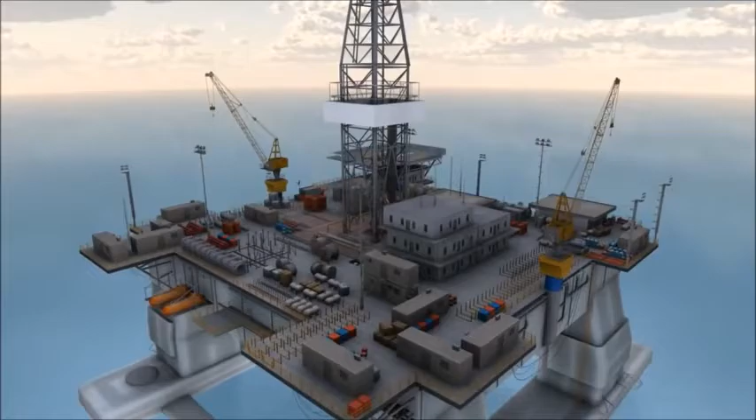Shell Deepwater is fueling the growth of upstream Americas by safely developing new reserves and maximizing the potential of its existing producing assets in the Gulf of Mexico, Brazil, and Venezuela.

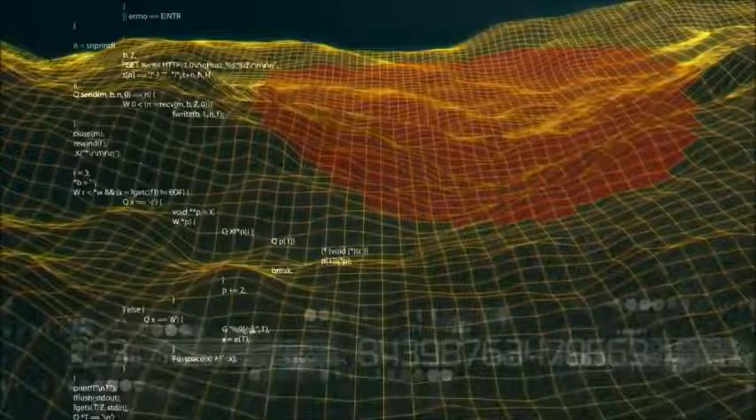Drilling a safe, deep-water well can take years of planning and preparation. After identifying potential oil and natural gas reservoirs beneath the seafloor using seismic technology, a drill site is selected. Shell geoscientists choose the drill site location on the seafloor based upon the safest well path that will encounter the targeted oil and natural gas.

For an exploratory well, in water depths up to 9,000 feet deep, this seafloor location is generally directly above the reservoir.

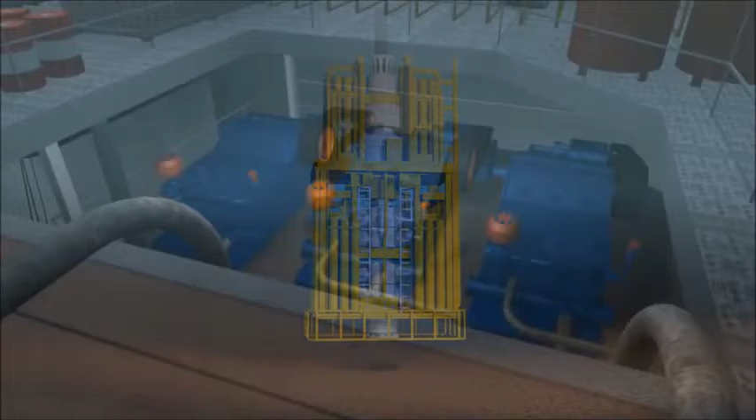A drilling rig is required to drill a well. In deep water, the rig may be on one of three vessels: a drill ship, a semi-submersible vessel, or it may be part of a floating production platform. All rigs have a hoisting system to raise and lower the drill pipe and tools needed to drill the well, a blowout preventer or BOP stack, and a pumping system to circulate fluids in and out of the well while drilling.

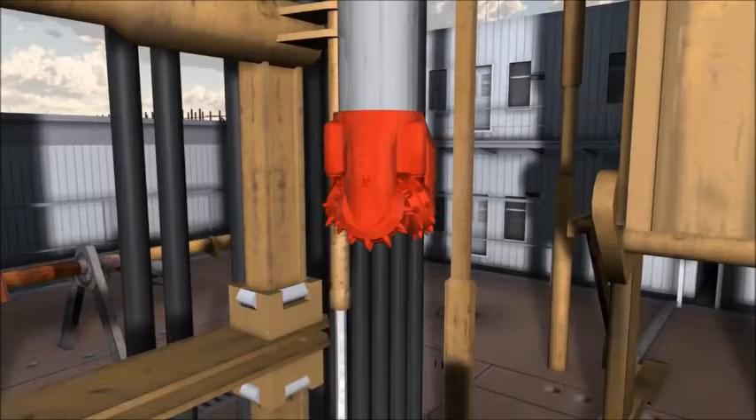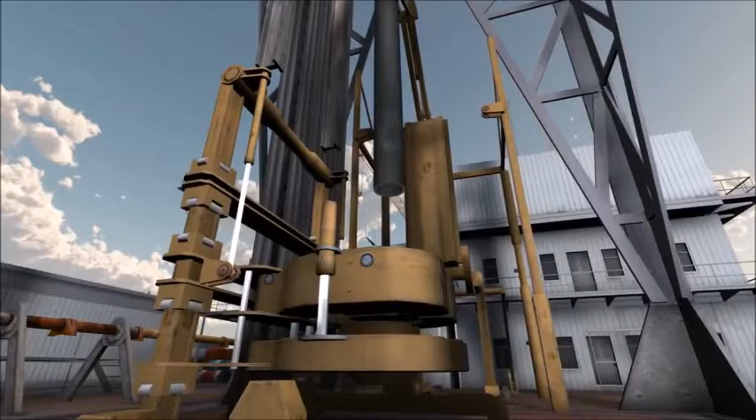It's time to drill the hole or well bore using a drill bit. This initial step is called spudding in the well. The shallow sediments just below the seafloor are often very soft and loose. To keep the well from caving in and carry the weight of the wellhead, a large diameter base pipe or casing is drilled or jetted into place.

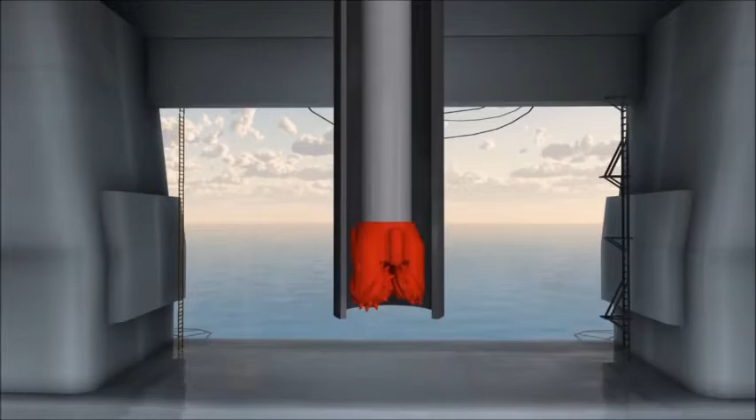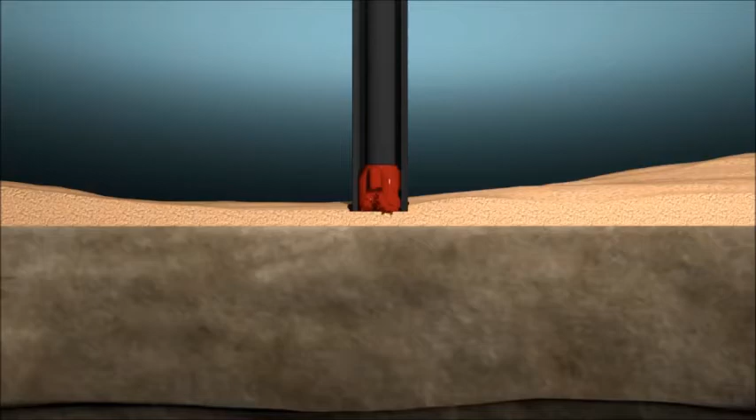The base pipe is assembled at the rig floor, and a drill bit connected to a drill pipe is run through the inside to the bottom of the casing. The entire assembly is lowered to the seafloor by the rig hoist. At the seafloor, the driller spuds the assembly into the seafloor sediments, then turns on the pump. Water or a drill fluid is used to jet the pipe into place until the wellhead is just above the seafloor.

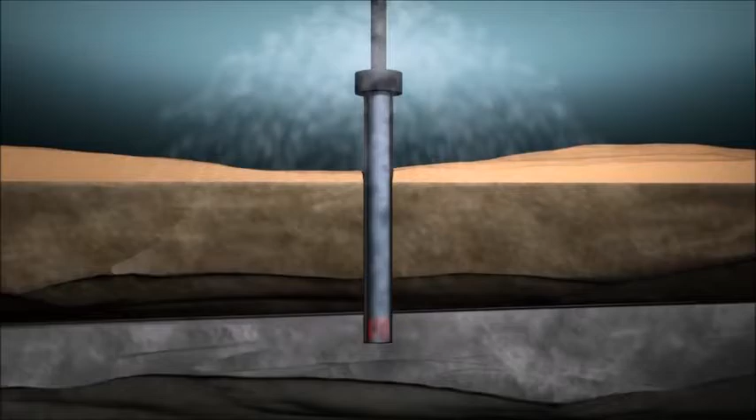With the base pipe and wellhead at the right depth, the driller will release the bit and drill string from the jet pipe and drill ahead. While the well bore is being drilled, mud is pumped from the surface down through the inside of the drill pipe.

The mud passes through the jets in the drill bit and travels back to the seafloor through the space between the drill bit and the walls of the hole. Drilling mud is used to: 1. Lift rock cuttings from the hole, 2. Keep the drill bit cool and lubricated, and 3. Fill the well bore with fluid to equalize pressure and prevent water or other fluids in underground formations from flowing into the well bore during drilling.

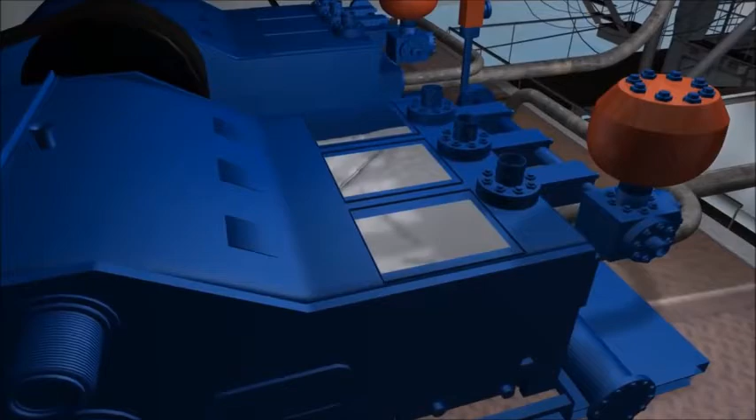The mud is an environmentally friendly water-based mixture of clay for thickness and fine ground rock or barite for weight.

At the planned depth, the driller will stop drilling and pull the bit out of the hole. A smaller pipe or casing string is then screwed together, connected to the drill pipe, and run down to the seafloor and into the well.

To permanently secure the casing in place, cement, followed by mud, is then pumped down the inside of the drill pipe. To separate the cement from the mud, a cementing plug is used. The plug is pushed by the mud to ensure the cement is placed outside of the casing, filling the annular space between the casing and the open hole wall.

On some locations, a second surface casing is needed, thus the well is drilled even deeper. In this second surface casing interval, the well is cemented using a second smaller casing string, repeating the same process used in the last hole section.

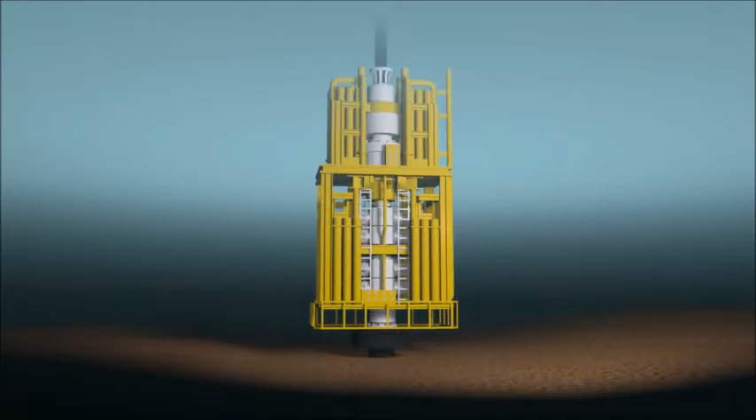At this point in the well, the pressure in the deeper rock may be too high to continue with the simple water-based clay mud, or there may be the potential to encounter oil or gas. Before drilling below this point, a blowout preventer with a riser will be installed at the sea floor. The BOP stack is a massive system of valves and rams that protect the rig and environment from oil and gas flows should the weight of the drilling mud be too low.

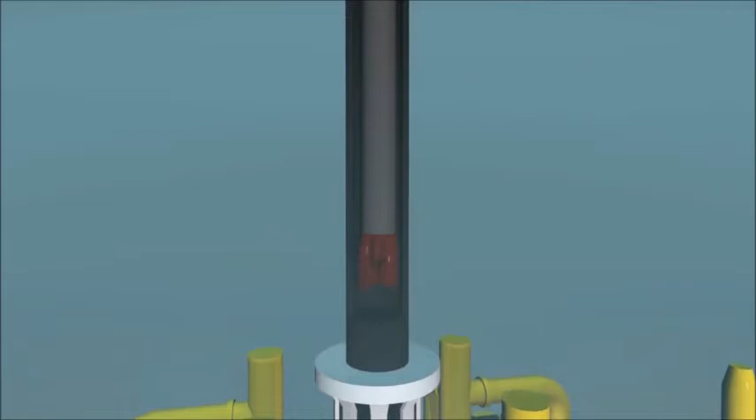The BOP stack is connected to a pipe called a riser. The riser connects the rig to the well and allows us to circulate the drilling fluid and rock cuttings all the way back to the rig on the surface. The BOP stack is fully tested before we drill further. Drilling now resumes with the drill bit and drill pipe always operating through the BOP stack.

Just as we did further up the hole, casing strings are run and cemented in place when needed to cover up the open hole sections. When the oil and gas zones targeted by the geologists are reached and the presence of an oil or gas zone is proven, a final casing string may be installed if the seafloor location is favorable for future development. This final casing string allows for the future safe production of the oil and natural gas.

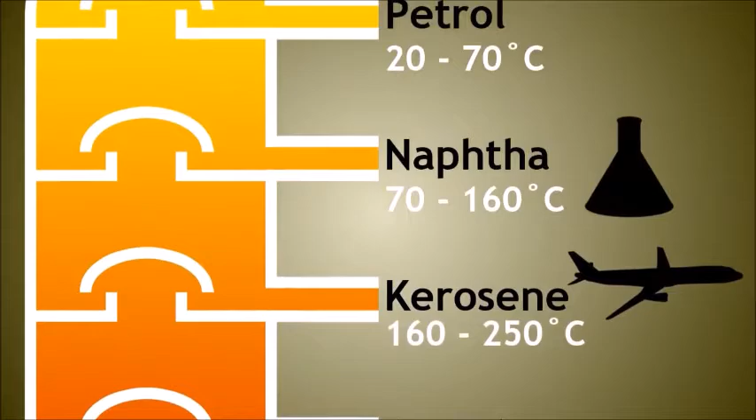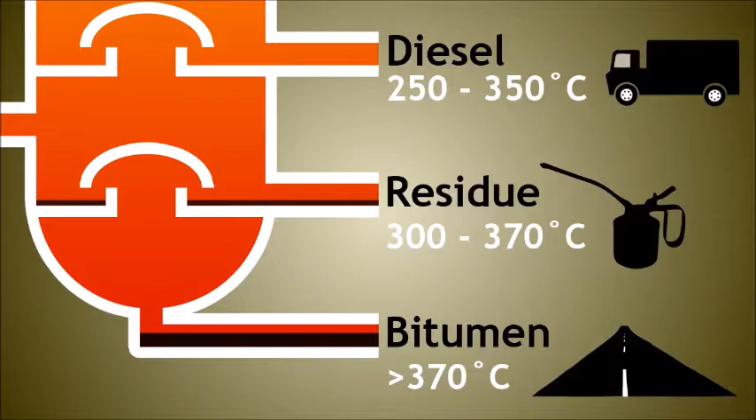In our other videos, we have learnt how fractional distillation is used to separate hydrocarbons into fractions with a similar boiling point. In this video, you will learn the names of some of the most important fractions and their uses. As you are now aware, large hydrocarbons have higher boiling points and so are removed at the bottom of the fractionating column. Smaller molecules condense higher up the column.

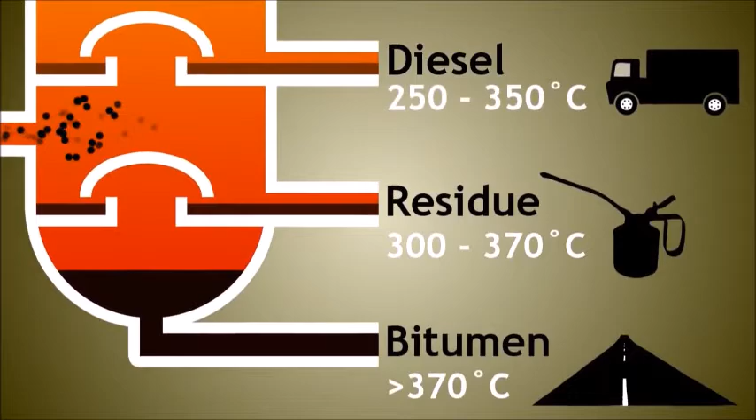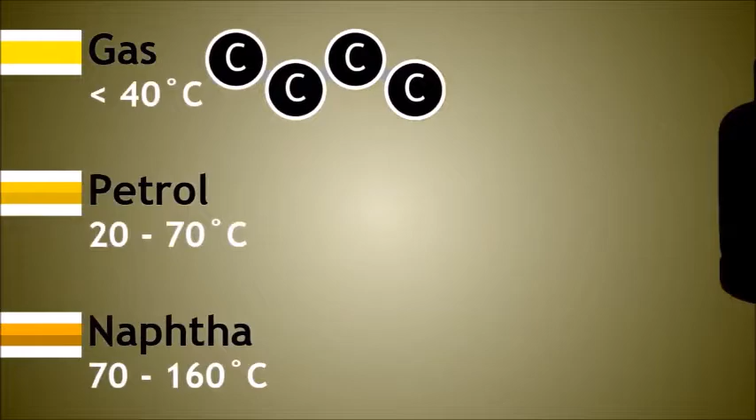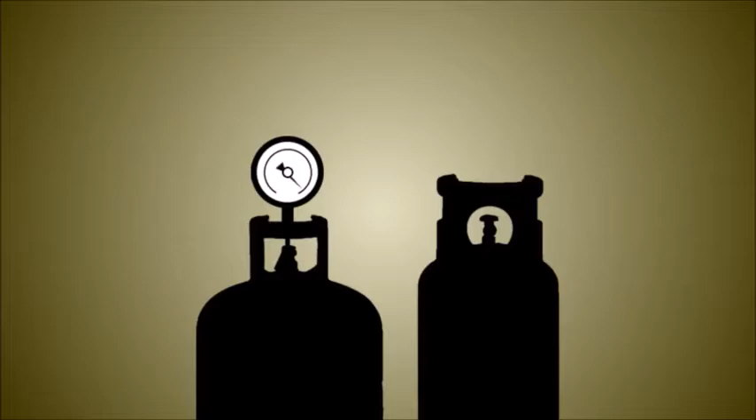We will now take a look at some of the common fractions as we move down from the top of the fractionating column. Some of the smallest molecules are between 1 and 4 carbons in length. This fraction has such a low boiling point that it is still a gas when it is removed from the very top of the fractionating column. This fraction is known as refinery gas or bottled gas, because it can be stored in bottles under high pressure. You could well have seen bottles of propane or butane running barbecues or heaters in your home, and these are examples of the refinery gas fraction.

Petrol is between 5 to 7 carbons in length. It is still a fraction of small chain hydrocarbons, and therefore these vaporise at a low temperature and are easily ignited. This makes it useful as a fuel in the internal combustion engine of a car or other vehicles.

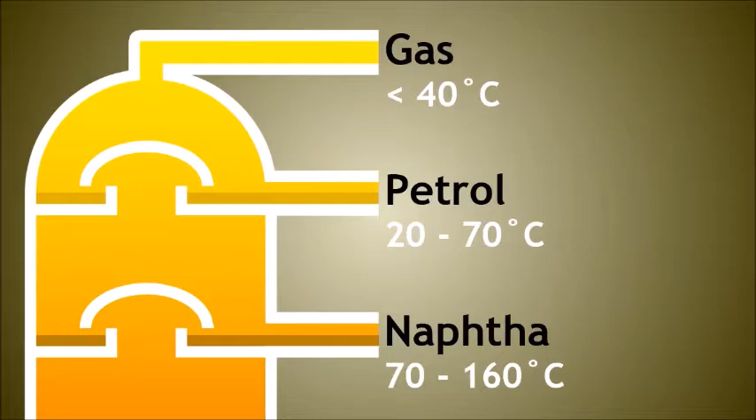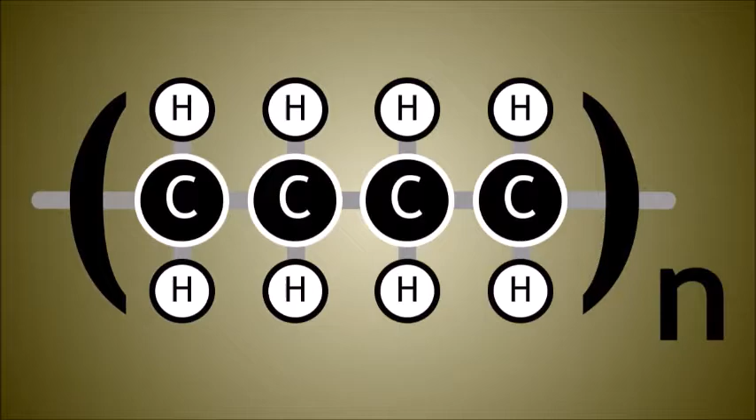Naphtha is not such a useful fuel, but it is a valuable source of organic molecules which can be cracked to make more fuels or form alkenes. Alkenes can be turned into polymers, and polymers can make plastics which are used in our everyday lives.

Kerosene has an important use as a fuel for jet engines, in aircraft and even in some rockets. Kerosene is also called paraffin in some parts of the world and is a common fuel burnt in paraffin or kerosene lamps used for lighting.

Diesel is the next fraction. It is a common fuel in cars, vans and lorries. It is not as volatile as petrol, and instead of spark ignition, it ignites under compression.

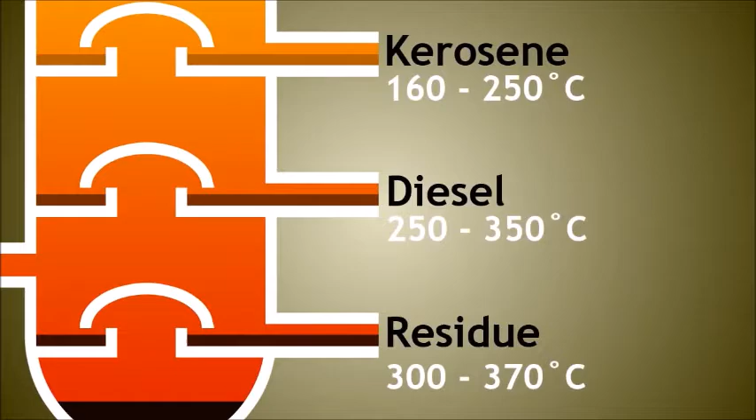Below diesel are the residue fractions. Fuel oil is a fuel used in power stations and ships. Lubricating oil sticks to surfaces and reduces friction and protects from rust. And finally, waxes, which along with the oils can be used for polishing surfaces.

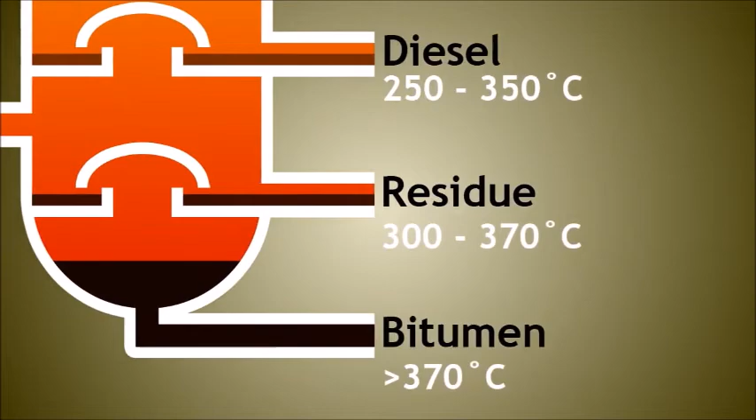The very bottom fraction is bitumen. This is a thick black adhesive used on roads, either as the surface finish or combined with stone chippings to create a solid, resistant material. It can also be used to cover roofs due to its waterproofing properties.

All these fractions are separated from the crude oil mixture. To try and explain the importance of crude oil, consider these facts. There are estimated to be over 1 billion cars in the world, of which many will be using petroleum as their fuel. There are many million flights each year, each burning kerosene fuel. Not forgetting the massive plastic that is made and used each day for products and their packaging.

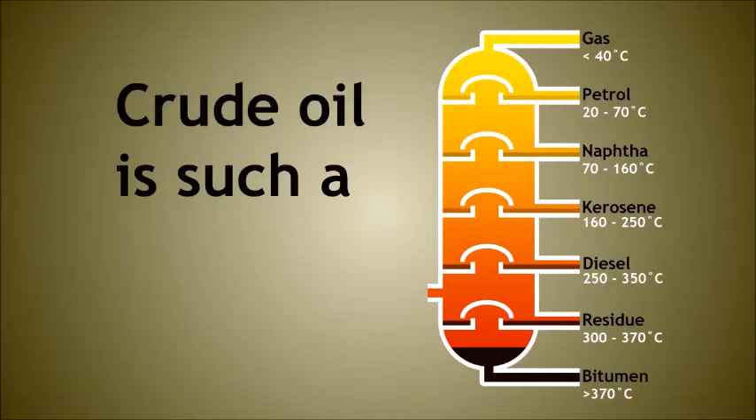Even the bitumen used to surface and resurface roads around the world. As you can see, crude oil contains many useful products that just need to be separated from the crude oil mixture. Now, at the end of this lesson, you should have a better understanding of why crude oil is such a valuable resource and the use of each of the main fractions.